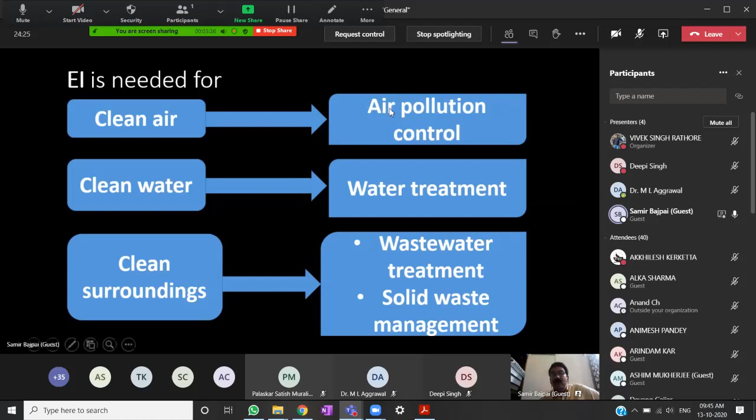Then we have to provide clean water, and for that we need to carry out water treatment, because none of our water sources are in such prime condition that we can supply water directly to the population. We need to go for water treatment. Then we have to provide clean surroundings, which is not possible unless we go for waste management. And waste management will involve treatment of liquid waste and treatment of solid waste. So wastewater treatment, wastewater management and solid waste management all come into the domain of environmental infrastructure.

Now, if you look at environment, what is environment? We use environment in different contexts, different references. So depending upon the context or reference in which a person is talking about environment, it can have different meanings, different connotations. So basically, what we are talking about here is the physical environment, which we all have studied in our school books, in environmental ecology papers. Basically, physical environment consists of three major spheres on Earth.

Atmosphere, which pertains to the air we breathe, then hydrosphere, which pertains to the water we use, and lithosphere, the soil surface on which we are dependent for our agriculture, for our minerals, etc. So all these are interconnected and joined together to give rise to the biosphere. And the biosphere is where life is possible. Unless we have this interconnectedness of atmosphere, hydrosphere, and lithosphere, life will be very limited. So life on Earth, as we see it in full bloom, is possible only because these three are there, and in connection with these three, there are living beings.

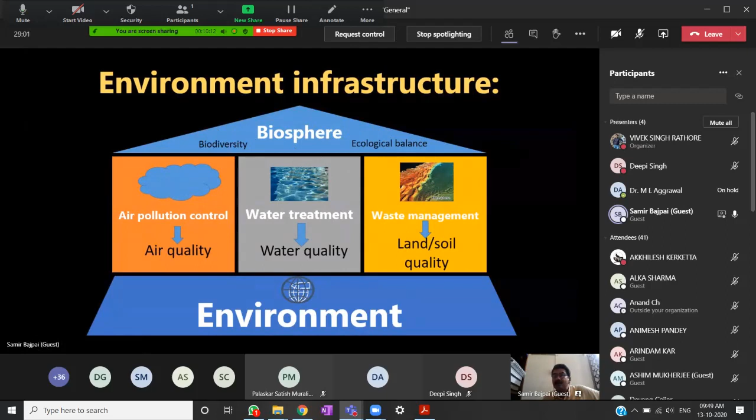And you may be hearing about this, that this is the first time in the life of Earth that such a rapid rate of species extinction is going on. They say it is the sixth mass extinction, and this is the largest and most rapid mass extinction of species. So these are challenging times. Ecological balance is being disturbed everywhere, be it water bodies, soil, or air. All the aquatic life, all the airborne life, all the land, soil-borne life is in trouble. And why are these in trouble? Not because of natural reasons, but because of anthropogenic reasons, man-created problems.

So basically, we can summarize environmental infrastructure as infrastructure that provides cities and towns with water supply, waste disposal and pollution control services. And it includes all the paraphernalia, all the accessories, all the appurtenances which are essential to establish, maintain, and run these supplies. So you require an extensive network of aqueducts, pipelines, etc. An aqueduct is a structure where we are carrying water through a pipeline, canal or channel, and when you come against any obstruction, you raise your pipe, channel or canal and take it above that obstruction. That type of construction is known as an aqueduct.

And you will be surprised that aqueducts have been very well known to human beings since the Indus Valley civilization. Later on, the Romans also built huge aqueducts to bring water to Rome. Then we need to create reservoirs to ensure quantity of supply to the population. Then from reservoirs, we need a water treatment system to treat the water to desired standards. Then we need water distribution pipes to bring this water to your home. So all this paraphernalia is required to give good quality water at your doorstep.

Then after use, this water will get contaminated. It can't be used for the same purpose again. So we need to collect this water, which is known as sewage or wastewater. It is called sewage because it flows through underground, mainly circular pipes, which are known as sewers. So you need to install a collection system for this dirty water, also known as wastewater. And you need to install a network of sewer pipes right from your house to the treatment plant.

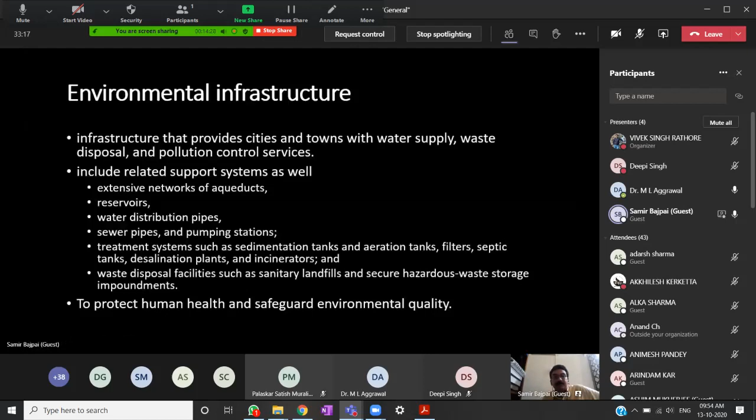These are only because we are not able to maintain this environmental quality and are releasing into the environment various contaminants, various pollutants, which are very harmful to human life. And some of these contaminants, pollutants, we don't even know about. So we need to be very careful what we do with the environment. So if you look at environmental infrastructure, to give you an idea about size and scale.

Agrawal sir? All good? So I hope I am audible.

So nowadays all domains of engineering are involved in designing, constructing, establishing, running and operating this infrastructure, right from civil engineering to microbiologists, to chemical engineers, mechanical engineers, electrical engineers, electronics and communication engineers, and with the latest technological tools coming up, big data collection, data science, data scientists, then you have machine learning. Sensors are nowadays installed to collect data, and this data is fed into a computer which has software which analyzes this data and tells the operator what to do.

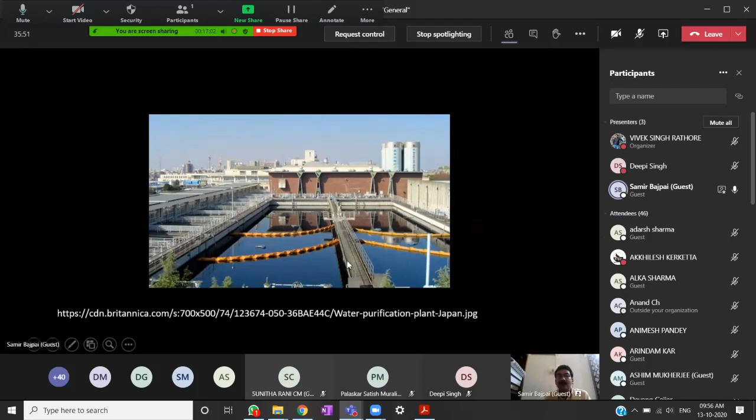Again, sorry for the same thing. Again, another look at the water treatment plant. So you have this aeration, then you go for settling. Sometimes filtration is also there, depending upon what kind of pollutants you remove.

So now you see, without environmental infrastructure, human civilization won't survive, won't flourish, won't grow. And this becomes very challenging nowadays, particularly. Earlier it was easy because things were simple. Population was of a small size. Cities were not so densely populated. But after the industrial revolution, then we came to the software revolution.

We have seen that because technology improved and quality of life improved, we have seen a lot of population growth. And this population growth is mainly in the urban sector, in cities. So a lot of urbanization has taken place. And because of this rapid population growth and rapid urbanization, the need to provide products and services to all people has grown. And because of that, industrialization has grown a lot.

And with industrialization comes release of contaminants, in all domains, be it solid waste, liquid waste, or air contaminants. And some of these air contaminants are reaching such concentrations that they are giving rise to what is known as climate change. And a result of climate change is global warming. And because of global warming, we are having a lot of issues, which we will discuss later on.

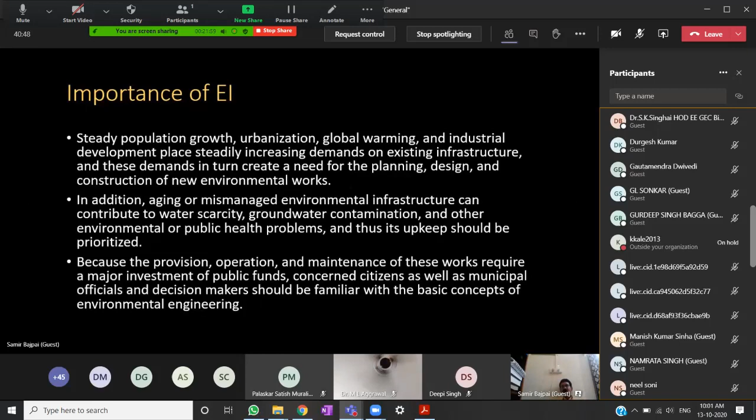And mostly we don't bother because we are getting water in our taps. The moment we flush, our waste is taken out, and the moment we dump it outside on the street, the waste is away from my home. But that is making things very precarious and harmful. As a society, we need to put priority on environmental infrastructure so that our next generation can live a better quality of life than us. In the present situation, our next generation is going to live a much more compromised quality of life than what we have today.

Another thing: when we talk about environmental infrastructure or management, we usually think in silos. We focus on a particular thing, like water treatment. We take water from some source and treat it with the available technology, based on how much money we have. If we don't have money, we supply water as it is. But we forget that everything in the environment is a continuum. The environment is one whole system.

It's not that the hydrosphere, atmosphere, or lithosphere is operating independently. They are all connected. You have contaminants released on land; some of these may evaporate and join the air. Some will flow when precipitation occurs and surface runoff occurs on the surface of the Earth.

Then all this water will get in contact with these contaminants, and many of these contaminants get dissolved in water, or many of these contaminants will be carried forward through sheer velocity of water, and then it will join our aquatic system, and then again from our aquatic system there is exchange with the surrounding land surface and surrounding air. So environment is in continuum.

So when we talk about environmental infrastructure, when we talk about rather environmental management, then we have to think about their interconnectedness. So you are seeing how these things are connected in this slide, and what type of impacts, direct impact and indirect impact, are occurring.

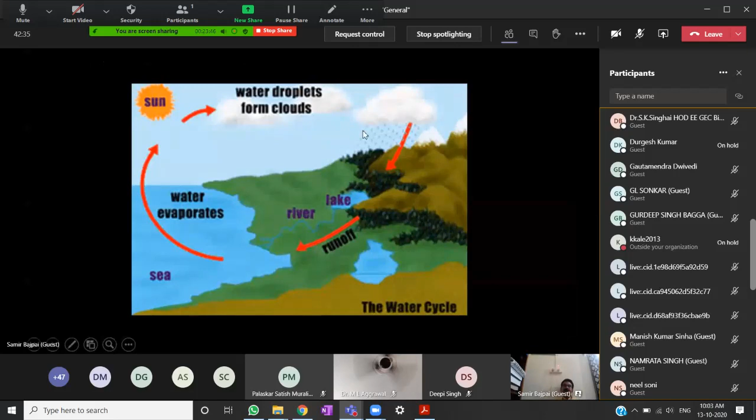Another diagram showing continuity, interconnectedness of environment is this hydrologic cycle, and it's a beautiful example of interconnectedness of environment. So you can see that air is connected with water, water is connected with land. In turn, land can give back to water. Quality of water depends both on air and land in contact with it. Similarly, quality of land will depend on quality of air and quality of water on it.

Because from air, we have always known that what goes up comes down. So from air contaminants will deposit on the land, affect the quality of land. Then surface runoff will take these contaminants to water. Then evaporation will take these contaminants to air. So there is interconnectedness in every possible way.

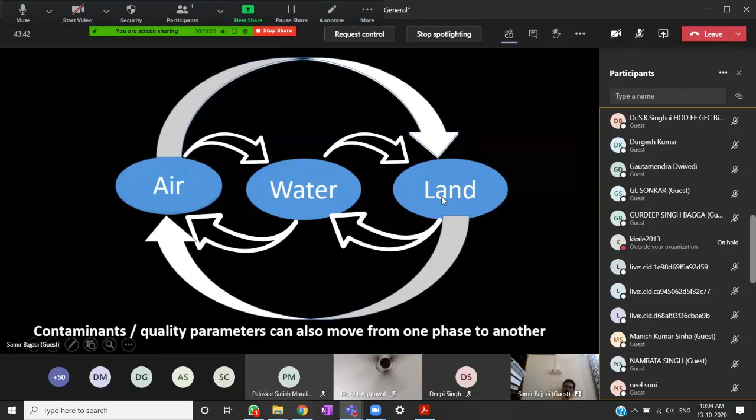And while we are thinking about environment management, we have to keep our eyes, keep our senses open to manage this interconnectedness also. So contaminants, quality parameters which decide the quality of air, the quality of water, the quality of soil or land, will move from one phase to another. They are always in contact with each other. So it's very important to look at the whole picture.

And if we won't look at the whole picture, then two things will happen. Either we won't be solving the problem, or if we are solving the problem, it will become very costly. And if we look at the whole picture, we will come with the effective solution, and this solution will be economical because we are acting at the right point where the picture is getting distorted, where the picture is turning bad.

At that particular point, we need to intervene, and if we intervene at that particular crucial point, then at very low cost we can prevent what is going to happen in future in our water, soil, or air. So clean environment means clean air, clean water, clean land. But again, the question comes: how much clean?

So to decide how much clean water, how much clean air, and how much clean land or soil we require, we have quality standards set for water, air, land, and soil. So there are quality standards for water, which tell us that we need to maintain the concentration of various parameters to this value, so that water can be accepted for a particular use. Similarly, for air, which we breathe, we have quality standards also. Then we have quality standards for land and soil also.

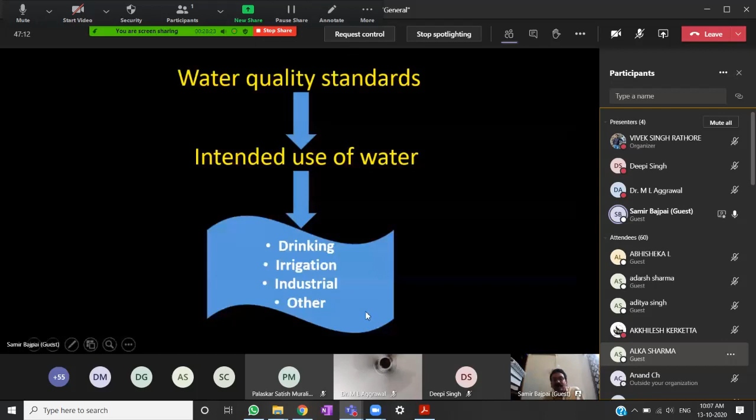And basically, there are certain global organizations also which do continuous research on these quality standards. Like health-specific standards are derived by the World Health Organization, WHO. A lot of these standards come from research in primary agencies: the Environmental Protection Agency, USA, and the European Environmental Agency in Europe, European Union. And in India, if we look at various standards, one agency which has been authorized to work in this area is the Central Pollution Control Board. So the Central Pollution Control Board works on a lot of these things, establishing standards.

And another agency is the Bureau of Indian Standards. So after research has established that these are the requirements, then the Bureau of Indian Standards publishes various IS codes establishing these standards. Like for drinking water standards, we have a code which is known as IS 10500. So let's have a look at this code.

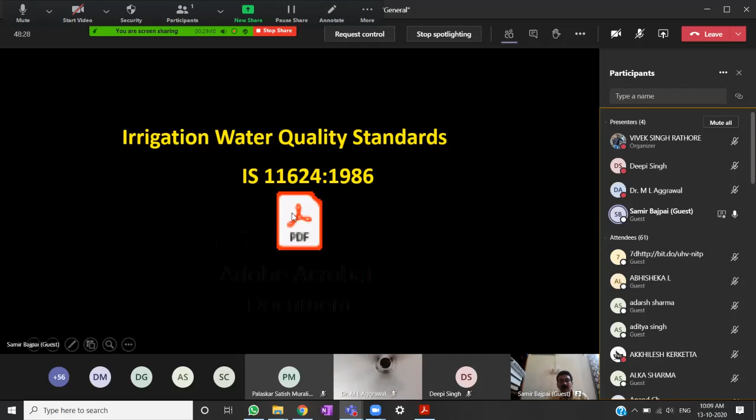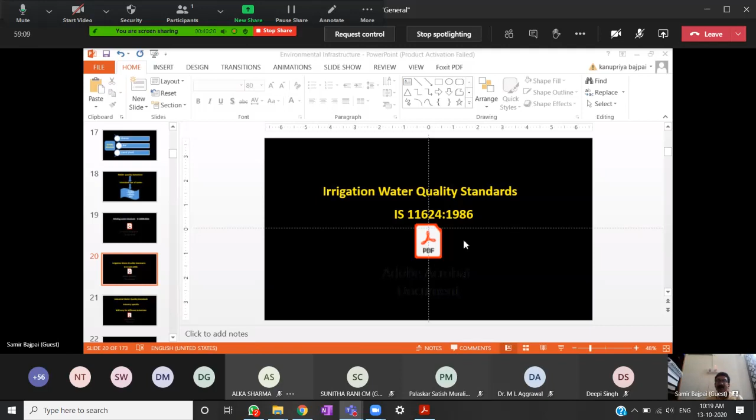So that is there. Then of course we have water requirement for industries. So for industrial water quality standards, it is industry specific. Different industries will have different requirements, and we can have a fast look at this water quality for industrial purposes.

So there are a whole lot of Indian Standard codes for this. For boiler feed water, there is a specific code, IS 10496. Then for iron removal, there is a specific code. So for different purposes you have different codes. For the pulp and paper industry, you have IS 2724. For swimming pools, you have IS 3328.

For the tanning industry, leather tanning, you require water for the cleaning of leather, and you have a different IS code. So specific industries will have different specific requirements, and for that you have different IS codes listed. You can refer to that set of IS codes. So you need to treat water to bring its quality to that standard, so that your process and your product quality is maintained.

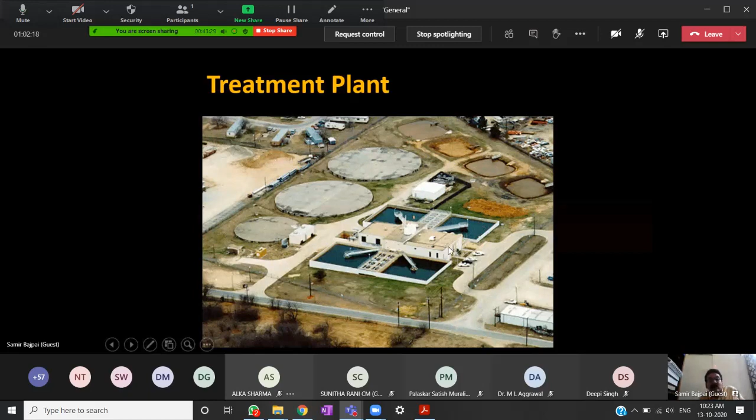So to have the desired quality of water, we need to go for water treatment. This is an aerial view of a water treatment plant; you can visit the water treatment plant in your city and see similar structures. But why is water treatment required? Because of all our water sources, be it surface water.

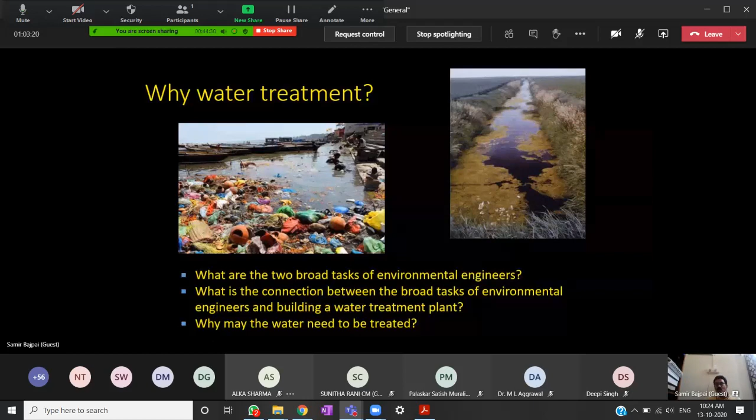So water quality is compromised, and water needs to be treated. No source of water is safe. Even the groundwater you are drinking, you don't know how many contaminants are dissolved in it. I am giving you the example of Raipur city, but for Bilaspur you can take the example of Arpa. For any city you live in, you can take the example of the local river.

So raw water quality is being affected very badly. In Raipur, there are many drains which are collecting wastewater from the city and draining it into the Kharun river. So you have contaminated water. So you see that there is a scheme to actually treat this water coming from these drains which are joining the river, and then supply the treated water to the river. So that is one way of approaching, controlling or managing the water quality in rivers and streams.

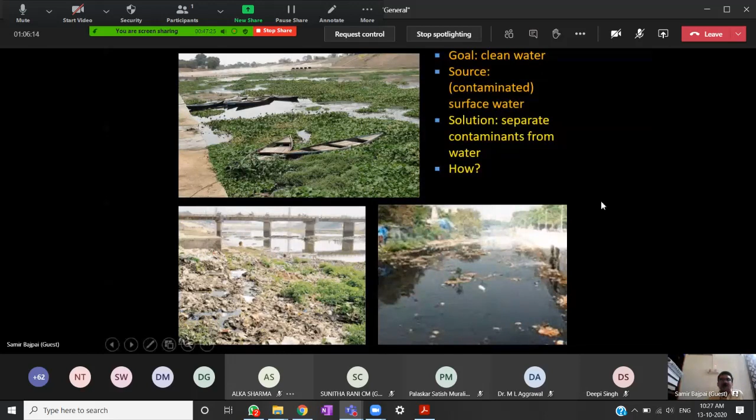So why do we need water treatment? Because in the present situation in India, none of the water sources have the water quality required for drinking water. So all these sources are contaminated. If you supply directly, the impact on human health will be unthinkable. There will be diseases, and their manifestation is already visible to us. The number of cancer cases is rising, the number of gastrointestinal cases, typhoid, and jaundice cases rising. These are manifestations because we are not able to maintain the quality of our raw water sources.

Treatment technology has a limit, and even if technology is available, the money available has a limit. So priority should be protection of sources. Priority should be water management. Then taste and odor and other aesthetic issues are there, to provide safe, potable, and wholesome water for domestic water supply. And water is also required for other purposes. So for industry and irrigation also, we need to make sure that the required quality is delivered. So we require water treatment depending upon the desired quality for a specific purpose.

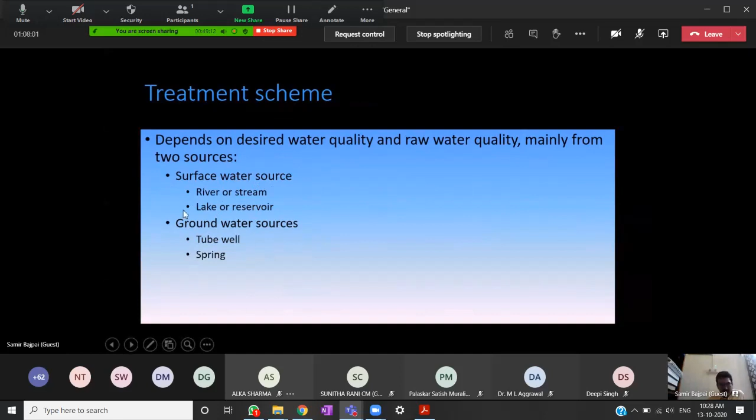So a treatment scheme typically will have a surface water source or a groundwater source. So the first thing is that you need to design, establish, operate and run environmental infrastructure to ensure that sufficient quantity of water of the required quality is available perennially, throughout the year and for a long time to come, in your river or stream or lake or reservoir. The most common infrastructure is that you can construct a dam on a flowing river and create a reservoir or a lake, or if you are fortunate, there may be a natural lake and you can tap your water from that.

If surface water is not available in your vicinity, then you need to go for tapping of groundwater, and then you can drill a bore and have a tube well installed, or if you are fortunate, you can have a natural spring coming up in your area, and you can tap water from that. So for all this you require infrastructure.

If a river, stream, lake or reservoir is there, you need to put up what is known as an intake structure to collect the water from this river or from the lake or reservoir. This intake structure will typically be an RCC structure installed in the flowing river, or installed in the lake or reservoir, with a screen.

So screens are made of bars with a small opening so that large size solids don't enter into this intake structure. And the inside of the intake structure will be hollow, where water will be collected. This intake structure will typically have two floors. One is known as the wet well, and the top one is known as the dry well. In the wet well, water is stored. In the dry well, you have electrical supply units and all.

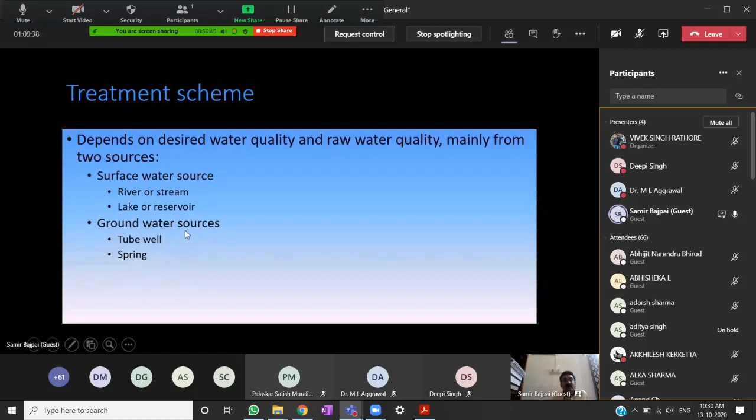And in the wet well, submersible pumps are there, from where water is pumped to your water treatment plant. If you are going for groundwater tapping, then the common structure is a tube well, and in the tube well a pump is installed, and from that you pump your groundwater to your treatment plant.

So water treatment is required to deliver the desired quality of water. You have a source of water which has a certain quality, and this quality will obviously not match the desired water quality for that particular intended purpose. So you will require treatment. And for drinking water quality, because it involves all types of treatment, we'll discuss the drinking water infrastructure required.

For drinking water quality, what is desirable is that we need to supply safe, palatable water which can be drunk by human beings. It should have suitable odor, suitable taste, suitable color, which we accept as good quality drinking water. It should be drinkable, it should be safe, it should not have any harmful contaminants present in it, and it should also provide the required minerals. Wholesome means it should have the minerals which are required for the human body.

And wholesomeness actually is severely compromised if you have what is known as an RO system installed in your house. Recently, the National Green Tribunal has directed the Government of India to stop ROs for sale in areas where total dissolved solids in water is not more than 500 milligrams per liter. So if your area has total dissolved solids less than 500 milligrams per liter, RO is going to be banned, because in the reverse osmosis process, all the dissolved solids are removed and water becomes entirely free from dissolved solids.

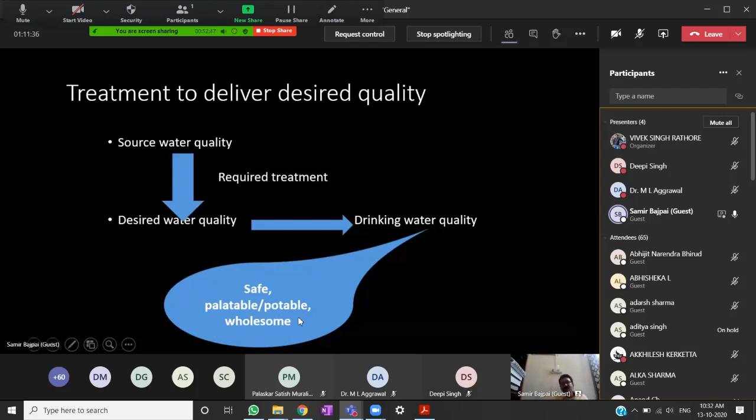But not all the dissolved solids are undesirable. You require certain dissolved solids, minerals for your health, particularly some calcium, some magnesium, a little bit of chromium, iron, copper, and a lot of these minerals we get from drinking water. You have these famous actors recommending RO, but my personal opinion is RO should not be installed for drinking water purposes. You can install RO for other purposes, but it is not suitable for drinking water.

So surface water will have a different type of raw water quality, and groundwater will have a different type of water quality. For surface water, again, there can be two types of sources. One is a flowing stream or river, and the other is a reservoir or lake, where water is in quiescent, calm conditions. A lot of solids are there, suspended and colloidal solids, so water will look dirty to us, and that property is known as turbidity.

Then you have microorganisms which are pathogenic, disease causing, coming into surface water. A lot of organic matter will join surface water because of surface runoff. And there are so many other dissolved contaminants which are harmful to human health if you continue to use the water for a long time. So basically we target the removal of these impurities, these contaminants.

In lake or reservoir water, a lot of suspended solids may be there because of eutrophication, because of algal bloom. If water is not flowing, algal bloom and aquatic plants will have a chance to grow. If water is flowing rapidly, they won't have a chance to grow; they will be flushed out. And soil erosion in the catchment area may bring a lot of suspended solids to the reservoir or lake.

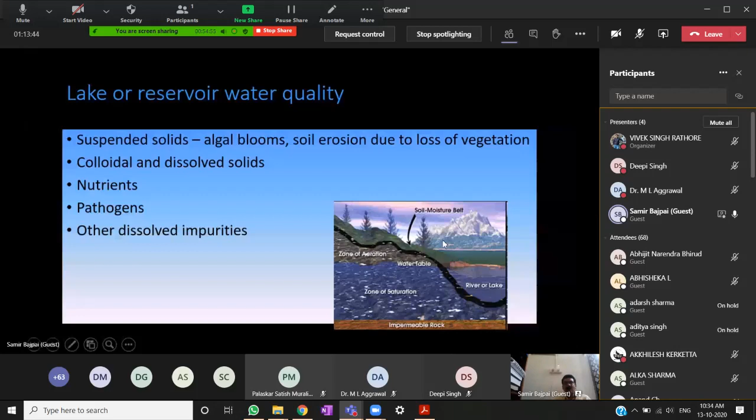A lot of colloidal and dissolved solids may be there because of biochemical reactions going on continuously inside the lake or reservoir. A lot of nutrients, nitrogen and phosphorus, will be joining from the catchment area. A lot of pathogenic microorganisms may join from the surface runoff entering the lake or river from the catchment area. And of course, there will be other impurities. So we need processes, terminology borrowed from chemical engineering.

So unit process: when chemical or biological principles are involved in treatment, then it is known as unit process. Unit operation: when physical principles of physics are involved in treatment, then you have unit operation. So sedimentation, filtration are typically unit operations. Unit processes, you can say, are when you go for coagulation, flocculation, or chlorination.

So we need to target these contaminants, which we know may be there in raw water. So we need to investigate the raw water quality and then find the gap between the raw water quality we are having and the intended drinking water quality, for example, and then select the required unit operations, the required unit processes to treat the water. So common unit operations and unit processes in water treatment are listed in this diagram.

So storage in water treatment. Basically, you need to store the water somewhere. Either you store it in an intake well or at the plant site. Then, if your water quality is very bad, you need to go for a little bit of chlorination before any treatment, and since this disinfection is before any treatment, it is known as pre-chlorination. Then you need to aerate, because water may be having several gases, so you go for aeration. Then you need to add some coagulants and mix rapidly so that the coagulant is uniformly distributed in the water body. Why we need coagulant, we'll discuss later on.

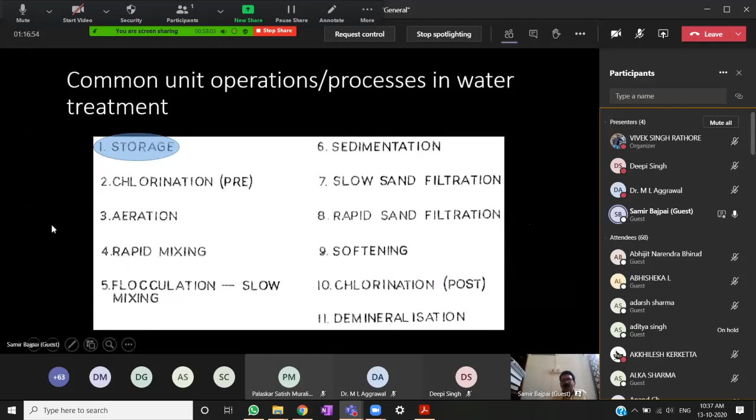So a conventional surface water treatment scheme will typically look like this: you have raw water, you screen the raw water, then you go for coagulation, adding chemicals which coagulate the solids, generate floc, and solid particles are attached to these flocs, making bigger solids. Then you settle them, then filtration, then disinfection, and after disinfection this treated water is stored, and after storage it is distributed to the population.

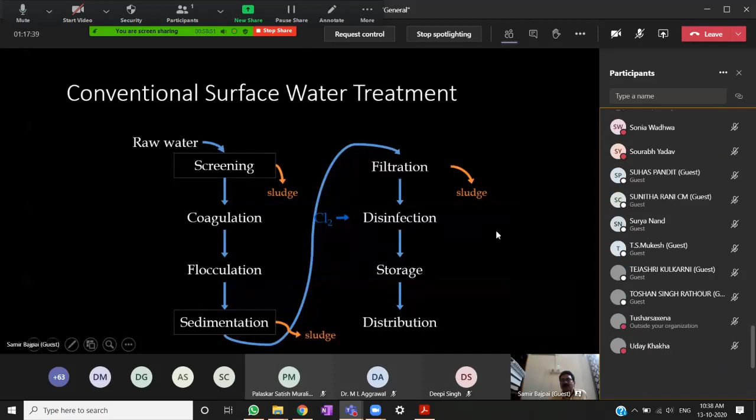So in a typical water supply scheme, you have a raw water source, and from the raw water source to the consumer end. This is a typical water supply scheme, which is common in mostly all the cities and towns in India as of now. A treatment plant can have different layouts, different units depending upon the quality of surface water. So you can have aeration, then coagulation, flocculation, settling, filtration, disinfection, and then you can supply the water. So this is a common surface water scheme.

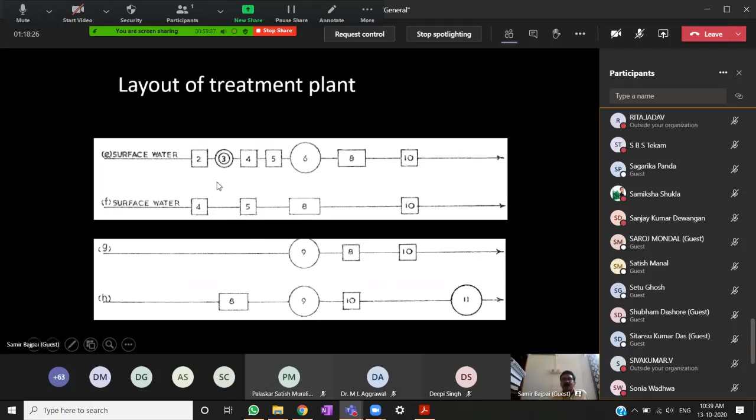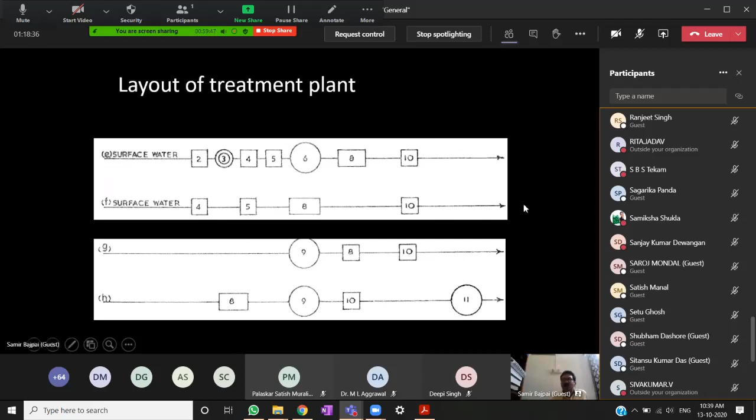Sometimes groundwater quality is very good, then you can directly go for chlorination so that you are inactivating disease causing organisms, known as pathogenic organisms, and then you discharge the water. So there can be other combinations also. These 10, 11 unit operations and unit processes are available at your disposal. As an environmental infrastructure professional, you can select a suitable combination of them depending upon the quality of your raw water and what type of drinking water quality you want.

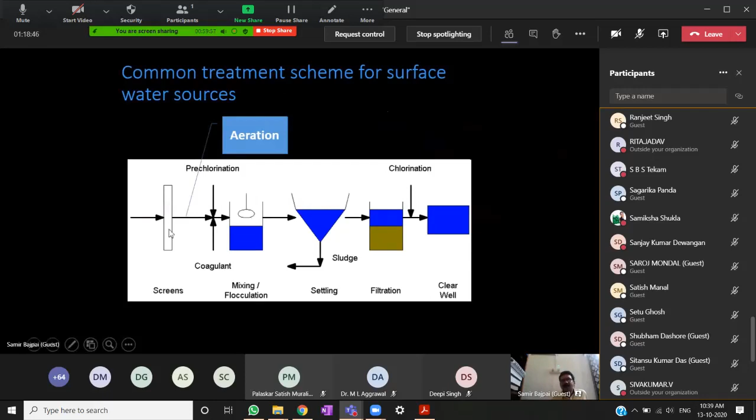So this is another diagram of various unit operations and processes arranged in sequence. So the objective is that these unit operations and unit processes are selected in such a way that we are able to ensure supply of safe, palatable, potable, wholesome water to the consumer economically.